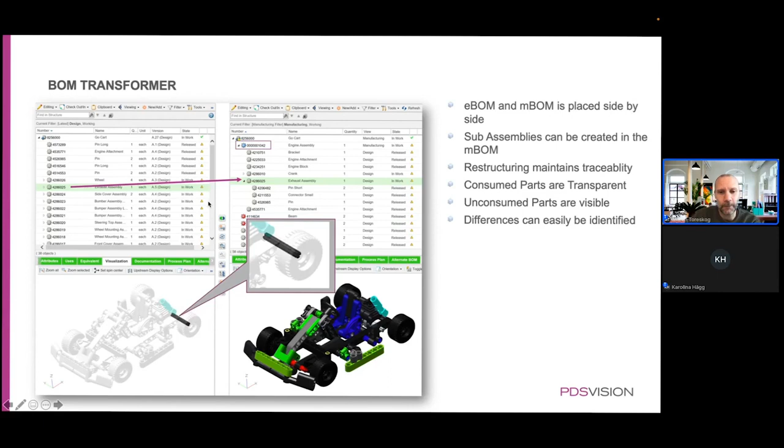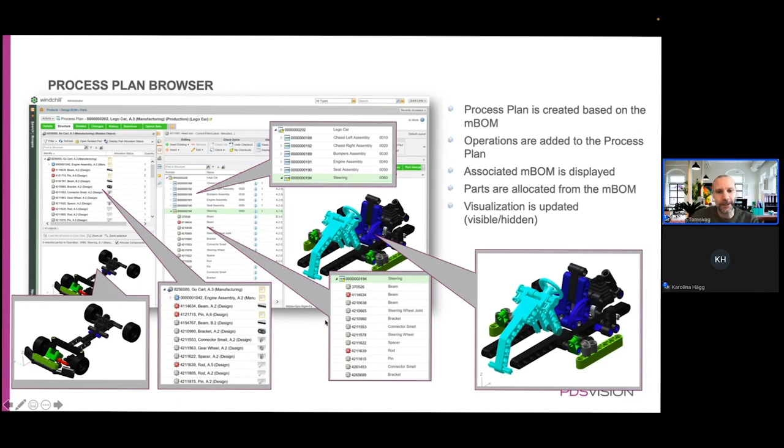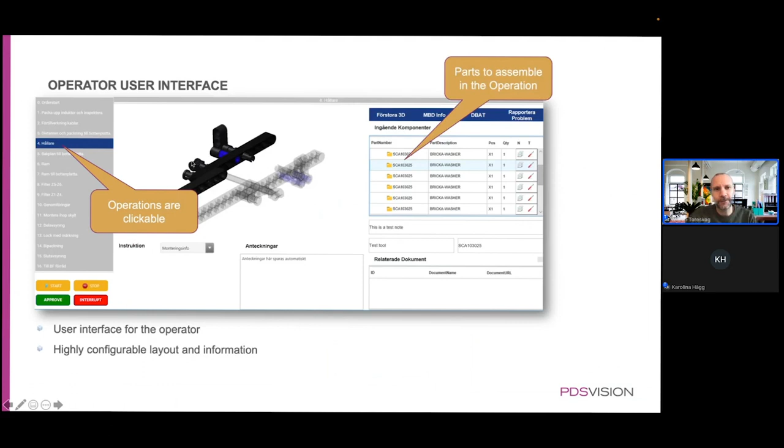The operator user interface. This is a screenshot from ThingWorx. And we have the list of operations that you saw in the process plan. We have the list of parts for each operation. When you click an operation, the visualization will be loaded. You could add required tools for that particular operation. You can have associated documents.

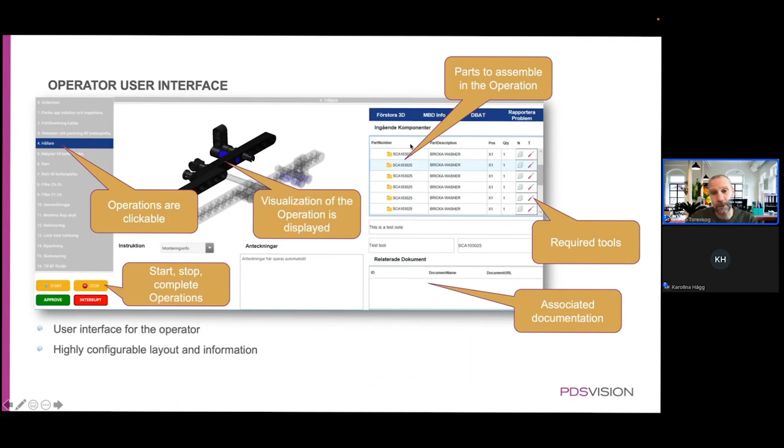You can start and stop the operations. And you can also report problems here. So creating a change notice, for instance, from ThingWorx and start a workflow in Windchill. So that was the slides.

I will now move into the demo part of this session, and I will start by creating an mBOM from an eBOM. So I will use the Lego car that I used during last sessions. I will then create a process plan from the mBOM. I will illustrate some of the operations, and then we'll take a look at the operator user interface. If we have time, let me know, Karolina, if we have time for that. I will also update the eBOM and see how that flows into the downstream processes.

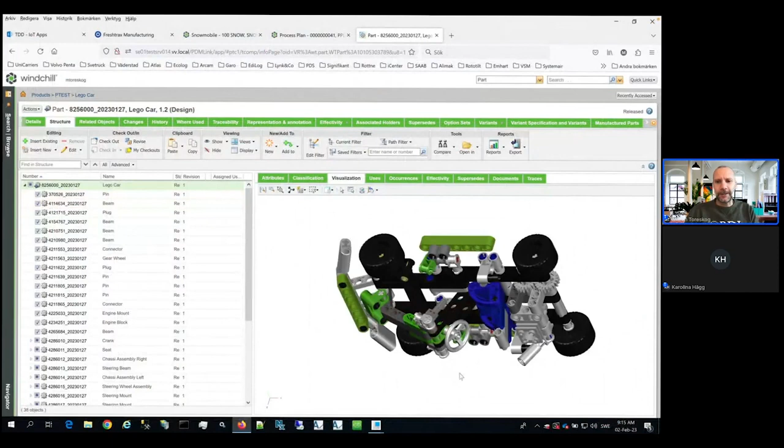So hopefully you can see my Windchill window here. Maybe Karolina, you can just verify that. Yes, it is looking really good.

It's a very nice car. Yeah, yeah, I built it myself.

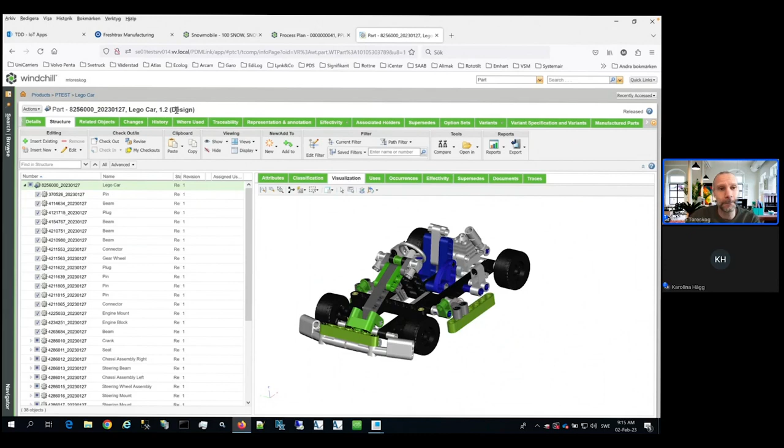So this is the engineering bill of material, and the view here, as you can see, is displaying design. That means that this is the design view of the BOM, which means that it's the eBOM. So I will open this in a separate window, which then allows me to have the eBOM and mBOM side by side. Currently, I don't have an mBOM, so it's empty here, but I have my engineering bill of material,

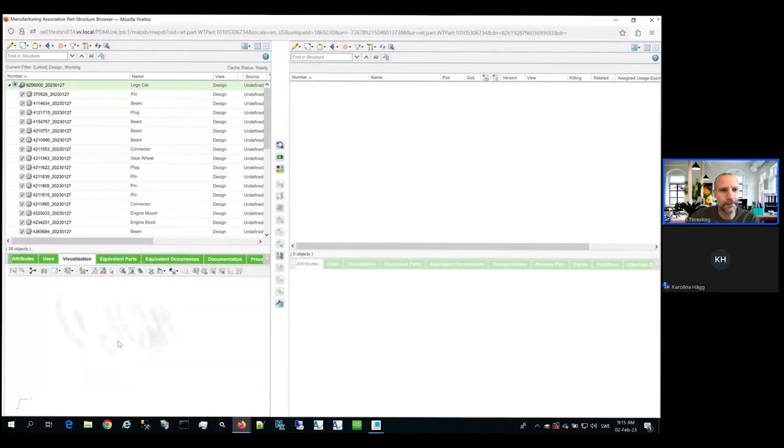and I have the visualization. If we just wait a second here, and the same thing works here. If I click a part, it will be highlighted in the BOM. If I click a part in the BOM, it will be highlighted in the visualization. So what I'm going to do is right-click the top level and say I want a new downstream branch.

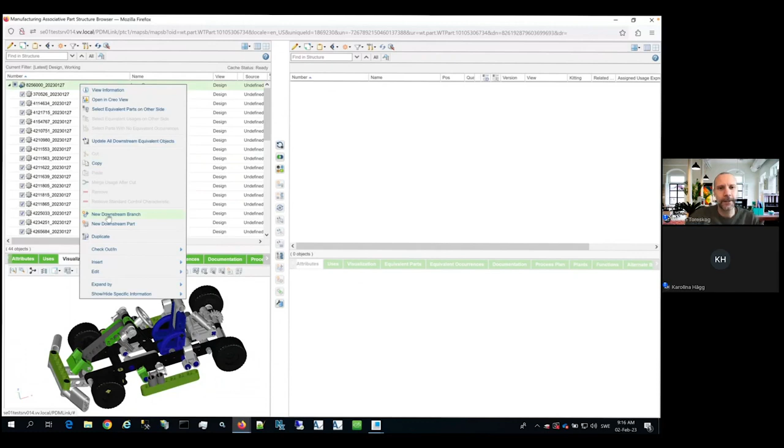Based on my configuration now, I will create a manufacturing view of this. So instead of the design view, I will have a manufacturing view. If I'm working with a service bill of material, it will display service here. So I'm creating a different view for service, a different view for manufacturing.

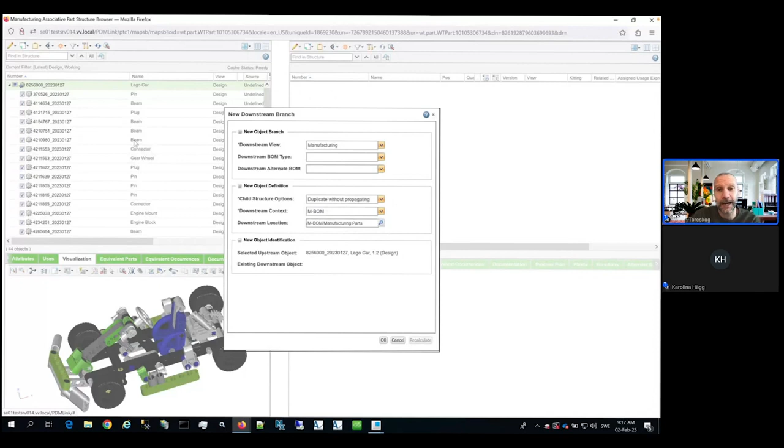When I do this, I have the option to either just create the manufacturing view of my part and skip all the children here. So if I want to completely restructure the bill of material, I can start from scratch, basically dragging and dropping the parts, or creating new parts here and then dragging and dropping from left to right. Or I can start by copying or duplicating the entire structure, which means that I will have an identical structure to start with. And I will actually do that now.

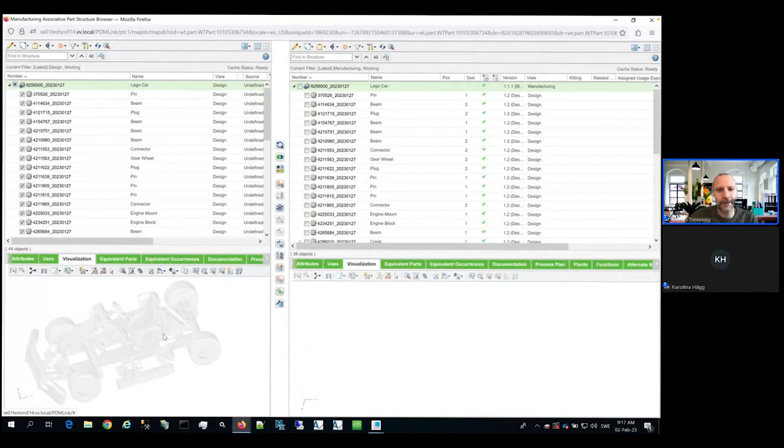So now I have my mBOM, and as you can see, since I copied the structure, all the parts have been consumed, which means that all the parts are grayed out like this. But on the mBOM side, we can see it's in shaded mode. So let's imagine that I didn't copy over this part, for instance, or that part has been added after I created my mBOM.

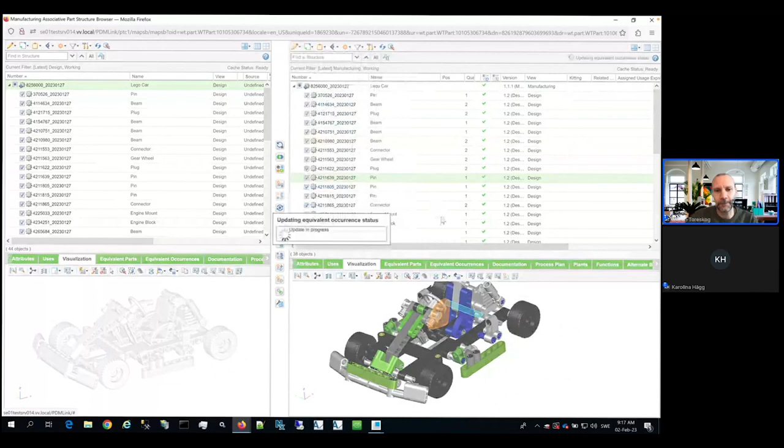So I will simply just remove that part, and we'll see what happens here. So that part simply shows up on this side, which means that this has not been added to my mBOM. So I can click that and then drag that and drop it on top of this one. But I will do a little bit more advanced action here.

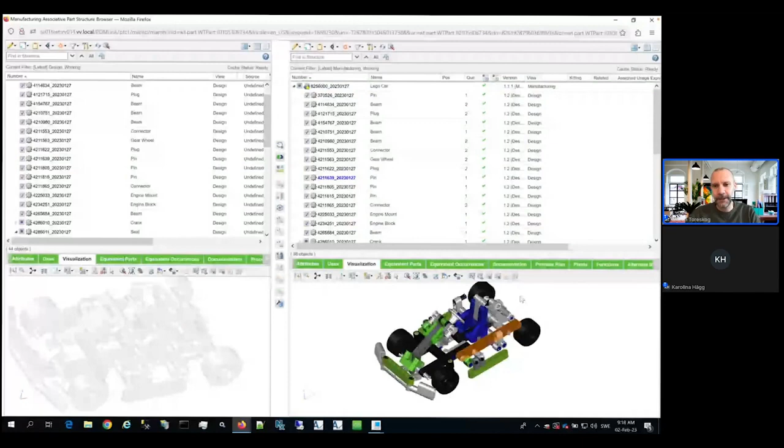So I want to create a pre-assembly of my engine. And as you can see here, the engine block, for instance, is directly below the Lego car. But I want to have that and the exhaust pipe and the crankshaft and so on inside my engine pre-assembly. So I will select my Lego car, insert a new part.

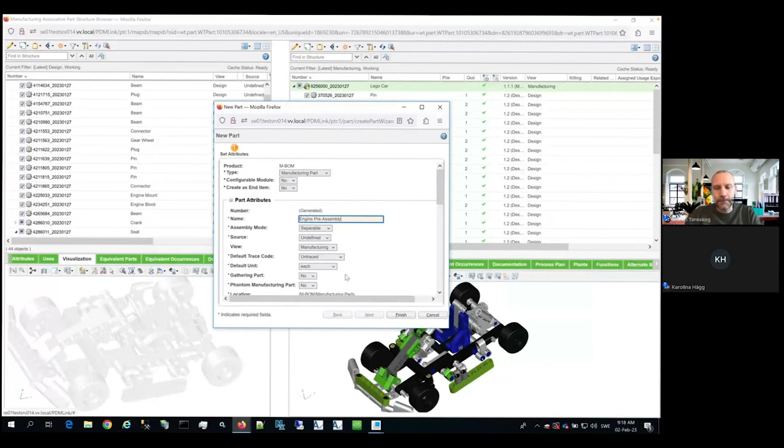And as you saw in previous sessions, I have different types of parts based on permissions, of course. If I'm a manufacturing engineer, I will probably not have this long list of parts, but potentially only the manufacturing part. So I'll call it engine pre-assembly. And that is then added to my BOM.

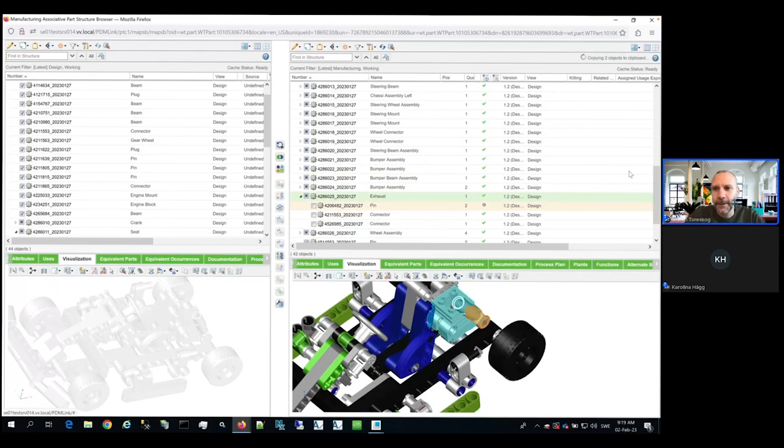As you can see, it doesn't have any children, but what I want to do is then select the engine block, select this part here. Let's see, I want the entire exhaust. So let's grab those. I will cut that from my top level and then right-click my newly created engine pre-assembly and simply paste it there.

When I do this, they're by default hidden, but I can click this to display the parts. If my machine works. Now, let me refresh there, and there you can see that they're back. But I will actually deselect those so I can see a little bit more what I want to grab here.

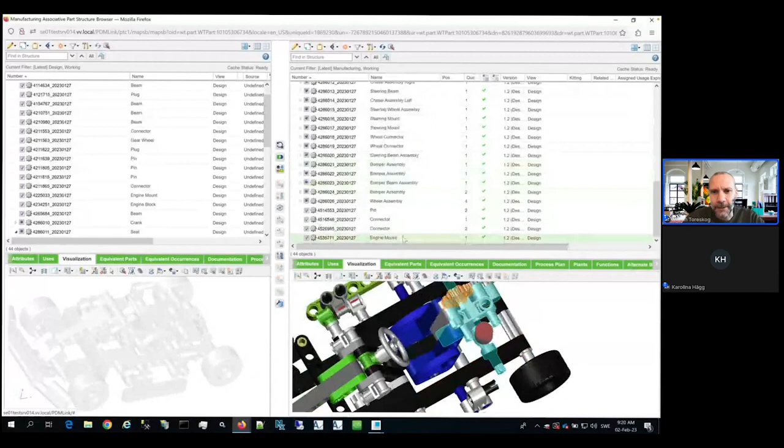So I will take that piston and then take the entire crank, and potentially that one and that one should be included in my pre-assembly. So I will cut that. I can drag and drop them here as well, but I think if it's a long way to scroll, it's easier to do it this way. And then paste it on top of that.

So the purpose of this is, of course, that when I produce the Lego car, I simply take one engine assembly from stock. I don't assemble these on the production line for the Lego car, if we imagine that we would do that. So I would have a process plan for the engine pre-assembly, which defines how to assemble this. And then I would have a process plan that describes how I assemble the Lego car. And then I will use this as an already assembled component.

If I would select the engine block here, since that has a new parent, it could be interesting to know where that is located on the engineering side. So I can right-click the part and say select equivalent part on other side. So even if I restructure it like this, it still has the traceability that this part is this actual part here.

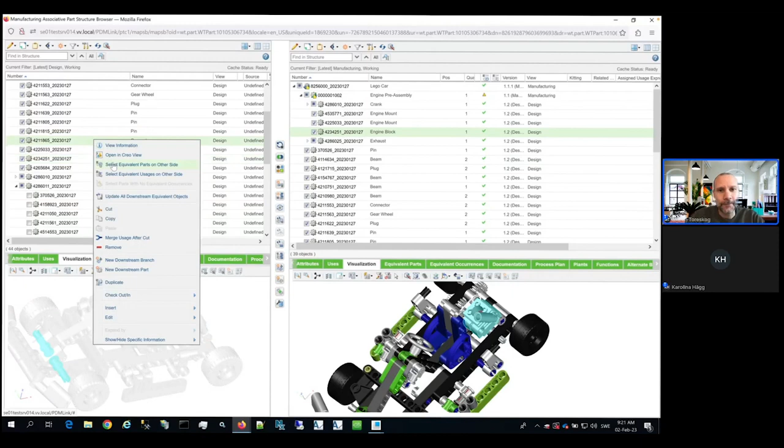And in the same way, if I would select another part here, it will then know where that is located. And this is how it keeps track of the consumption status. So it knows that I have consumed all the parts, and if new parts are introduced on the eBOM side, then I can add those to my mBOM. So I will check these guys in.

So what I did now, if we go back here to the overview, this was basically the first step. I'm creating the mBOM from the eBOM, restructuring it, but I'm not defining how I do things. This is what I'm going to do in the process plan.

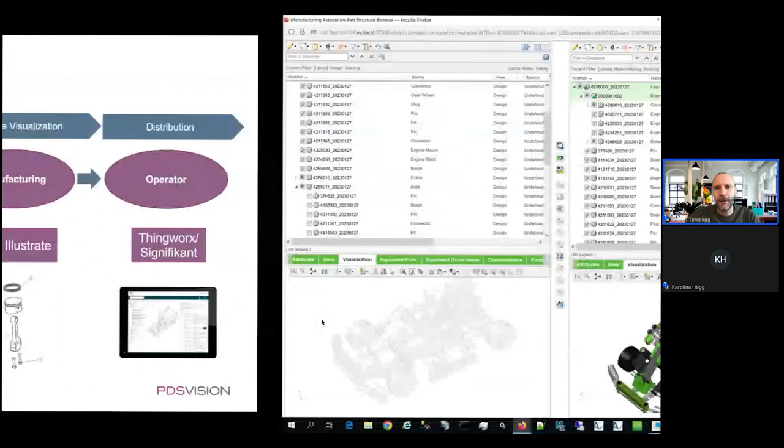So if I want to create a process plan for the engine pre-assembly, I'm selecting that part. And then I have a process plan tab down here. And then I would have a process plan for the Lego car, of course, to define how that is assembled. So I'm going to create one for the Lego car. Insert new.

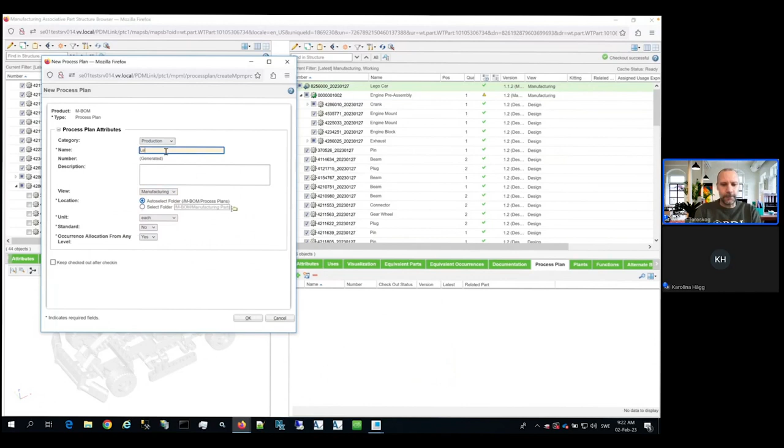Give it a name, Lego car process plan. So now I have my process plan. And as you can see, if I select another part, it will be empty here. So it displays the process plan or the process plans if you have multiple process plans for the selected part.

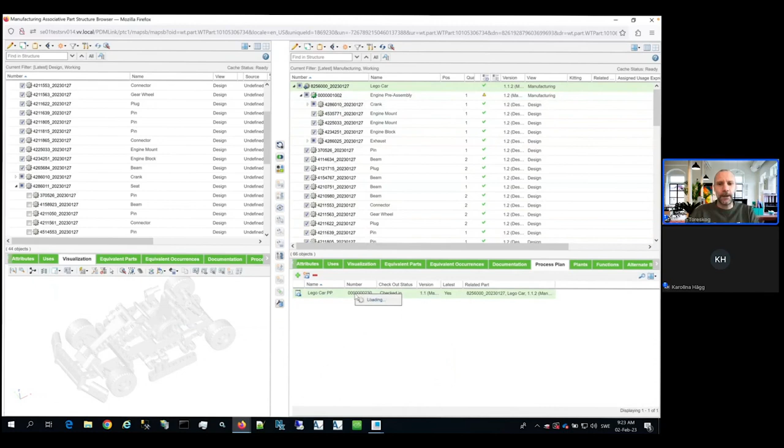And then I will navigate to the information page of the process plan now. As you can see, it's completely empty. I'm going to open the related part. So by creating the process plan, I associated that to the mBOM.

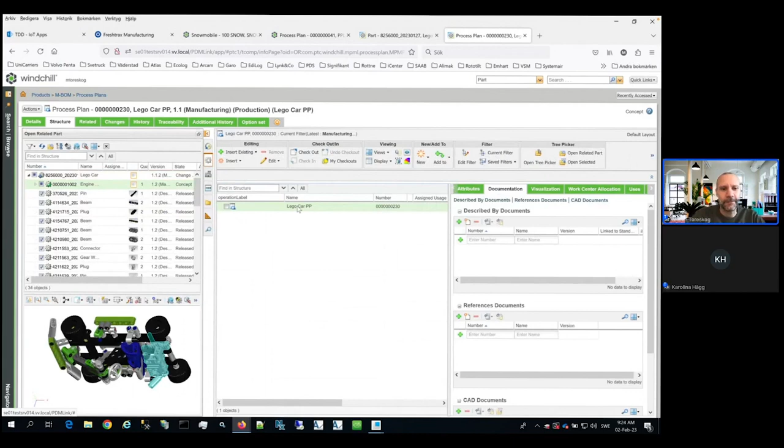So here I have the mBOM, and if I sort on number here, we should have the engine pre-assembly available here. So my task is now to create operations that define in what order I assemble this.

So we have two types in this configuration. We have two types of operation: a regular operation and what we call operation group. So typically in an ERP system, you would not define the operations on the assembly step level, you would have a higher level of operations. So this is what we represent with the operation group.

So let's say that you have different stations or work centers in your production line. That could typically be one operation group, but within that work center or that station, you would perform different operations. So these would be the regular ones.

So let's add 4 operation groups. And of course, I don't need to know how many I want. I can create them on the fly as well.

I can rename these. So let's call it, if I rename operations: order start, assembly 1, visual overview, assembly 2, and so on.

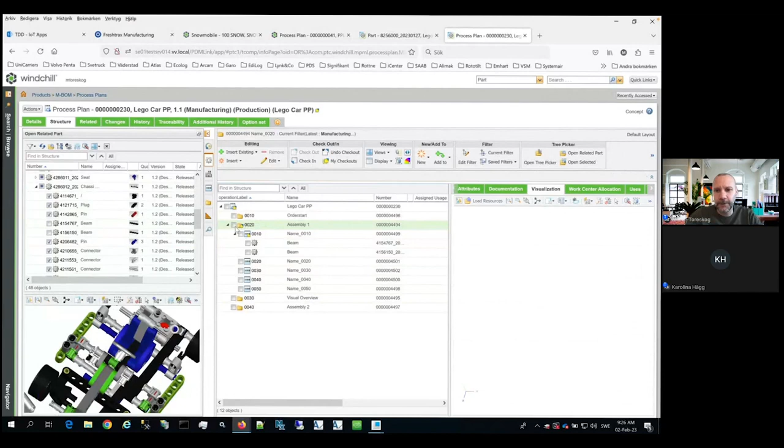And then I probably want that part in the same operation. And if I select that part, I can also, if you take a look at this, in the BOM here, I have 2 plugs. So if I would drag that over to the operation, I would actually get 2, but I want a single one here.

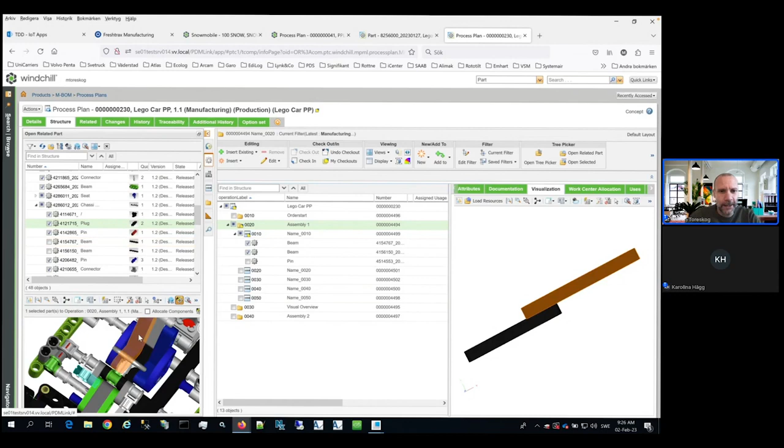So I can either display the BOM with occurrences, as it's called. Then it will split those 2 plugs into 2 rows. Or I can select the operation, select the part, and then say allocate. And then it will simply add only that part and not the second one.

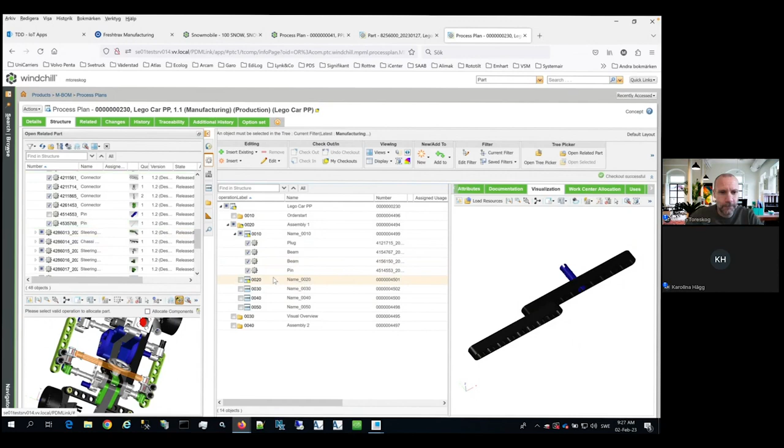So these are the parts that should be assembled in the first step. Then I will add that one and that one. Those should go into the second step. And then I'm not going to do the entire Lego car here, but I think you get the point that this illustration describes how I assemble these 4 parts. And then the second step will be to assemble this and so on.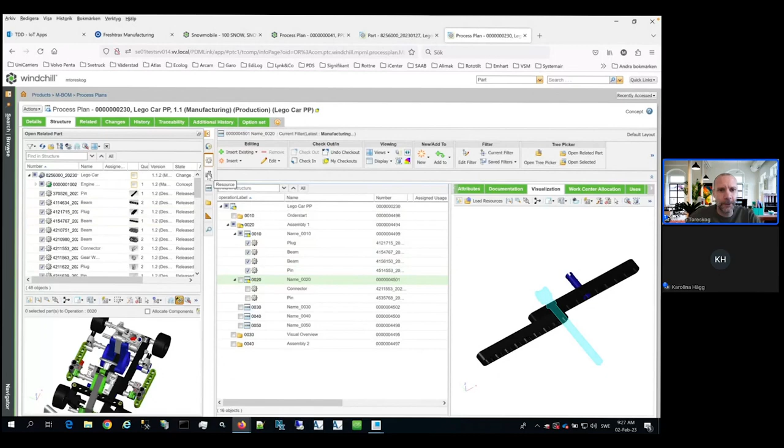It's also possible to add tools and fixtures and so on. So I'm going to click the plant icon. And here I've created sort of a library with tools and fixtures and work centers and so on.

So if we just imagine that we need a drill to perform this, I will simply drag and drop that onto my operation. And perhaps I need a screwdriver for the second operation here. And of course, if these have a 3D representation in Windchill, then those would show up here as well.

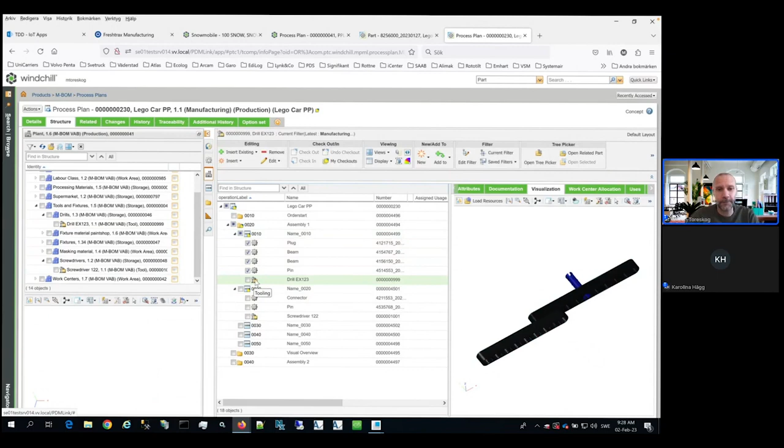In my case, they don't, but yeah, these are actually regular parts. It's a different type of part. So I'm going to minimize the browser there.

And if we take a look at this level here, for each of these operations, I can add additional descriptions, and I can add some formatted text with bullet lists, and do this, and then add a bullet list, and so on.

So you can also add documentation to this. So if you have a safety instruction or whatever, you can simply add that to the documentation tab here.

You can also define the time required for these operations. And of course, you decide on what level you want to do it. So let's say that the routing in the ERP system may be only defined to this level. So this would be the only thing that we would publish to the ERP system.

Then we would probably define the time on this level. But if the ERP system can manage the lower levels, the more detailed levels, we can add the time to these as well. So I'm going to scroll here. Here we have the setup time, the labor time, the processing time. There are more time attributes that you can add, and you can of course remove them from the layout here if you don't use it.

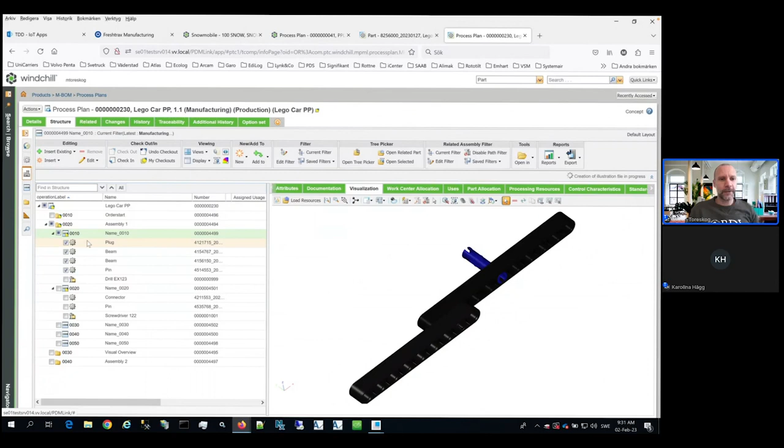So I'm simply going to right-click this operation and say New Illustration. Now Windchill generates a 3D model based on these parts and potentially tools and fixtures, and then it will prompt me to open Creo Illustrate, and I will log in to that.

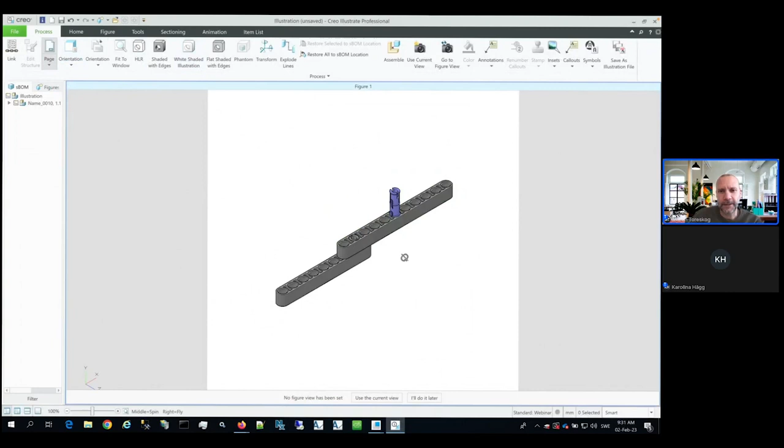I'm not going to go into detail about Creo Illustrate, we can do that in a separate session. But what we're basically doing here is exploding the parts.

So let's say I want to move this guy a little bit that way, and this guy there, and then have an explode line. Let's move this to there, add some explode lines.

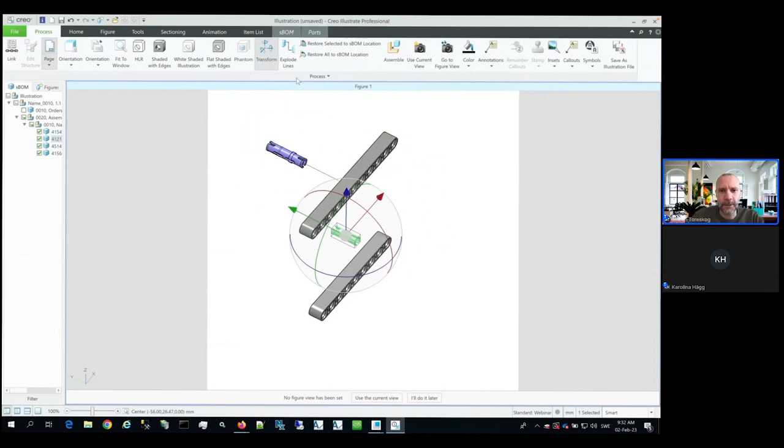And then perhaps just to clarify that it's actually that hole it's going to be inserted in, I can add what we call an inset. Yep, so let's keep it that way. And then I will simply save this.

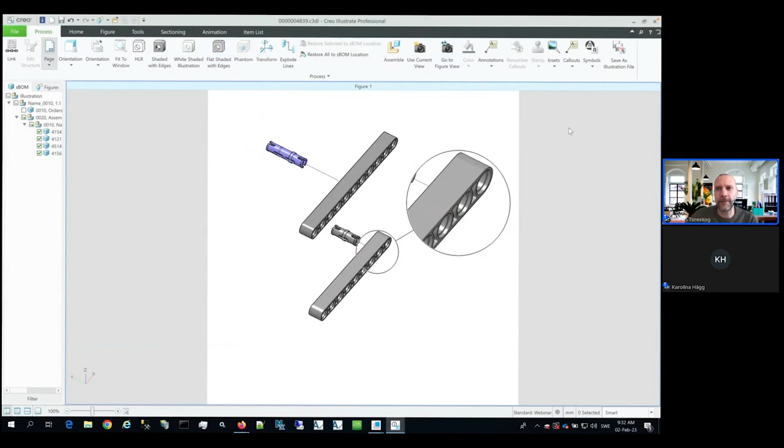So what Windchill will do now is store the 3D representation of this illustration along with an image file. So if I go back to the process plan now and select this operation - I may need to refresh this - we can see that it has added a document to this. This is the image of the illustration, but also the 3D representation.

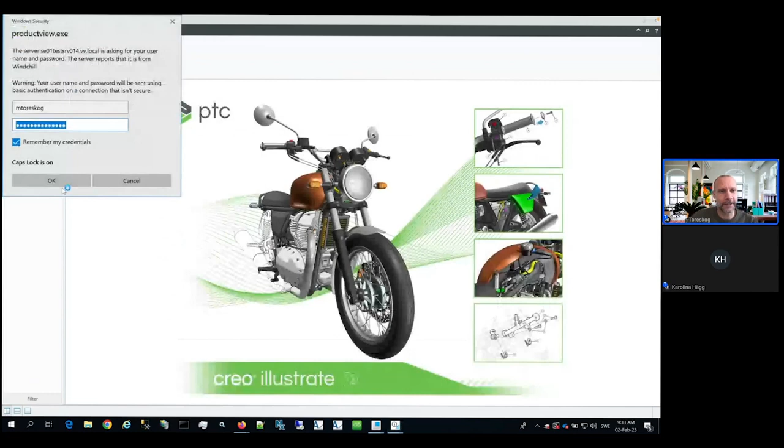I'm going to create one more illustration here, just so you can see that all the parts that have been previously assembled will automatically be grayed out in Creo Illustrate, so you can more clearly see what to focus on.

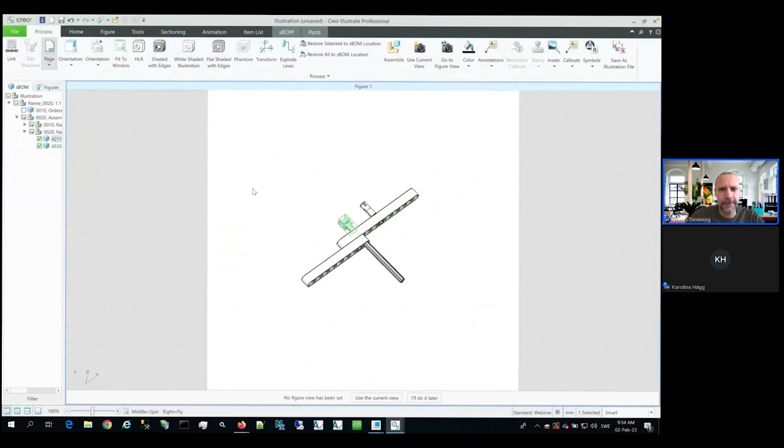So Creo. Here you can see that the parts I already assembled are grayed out. I'm going to do this. So my task now is, let's say the first step here is actually to put these two together. So I will simply do this, add an explode line, and perhaps something like this.

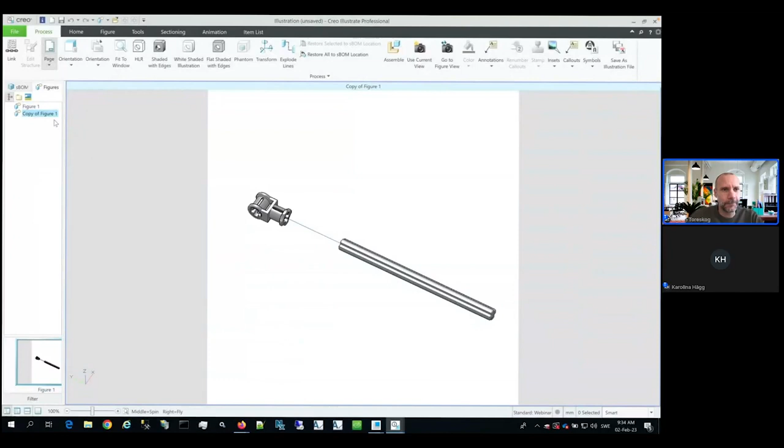But then I want to have another figure where I display how I put these together. So this should be restored, and then I will simply move these guys out like this, add an explode line to that. Oops. Like so.

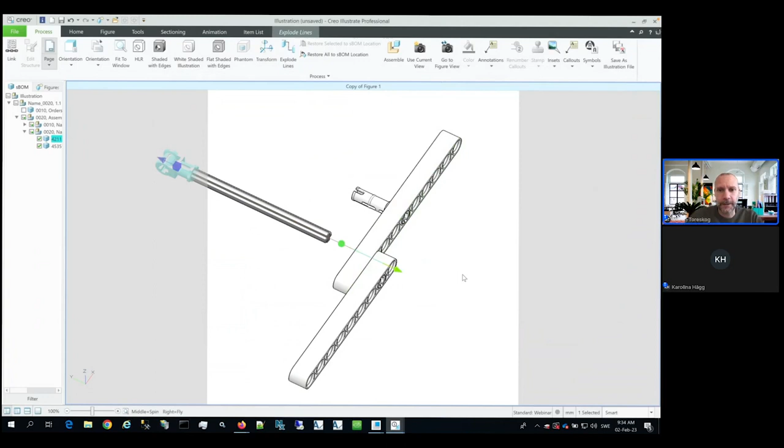So now I have two figures describing this one and this one. And I will save that.

And once it's done - let's see, it's still saving up here. Give it a few more seconds. There we go.

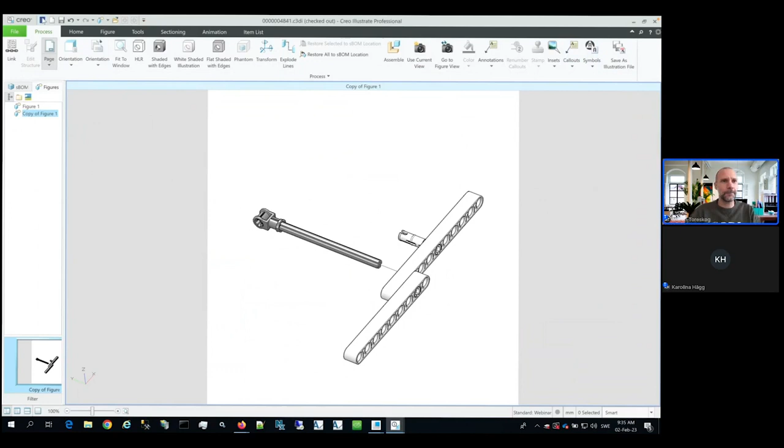So if I now refresh this, I will then have a document associated to this operation as well.

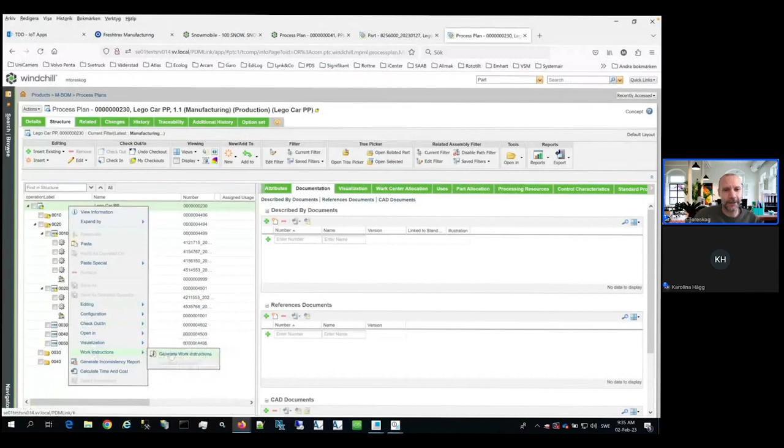So if I right-click my process plan now - and I'm aware this is not completed, but hopefully you get the idea - I can generate a work instruction. And that generates an HTML page with the images I've created, the illustrations, along with the parts used for that operation, and the required tools and so on.

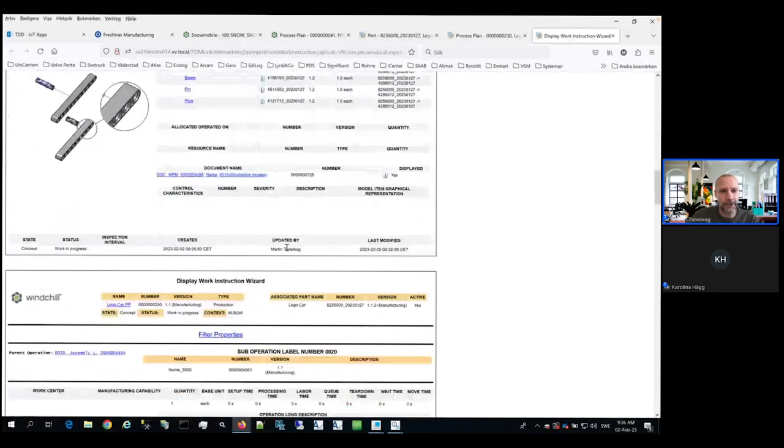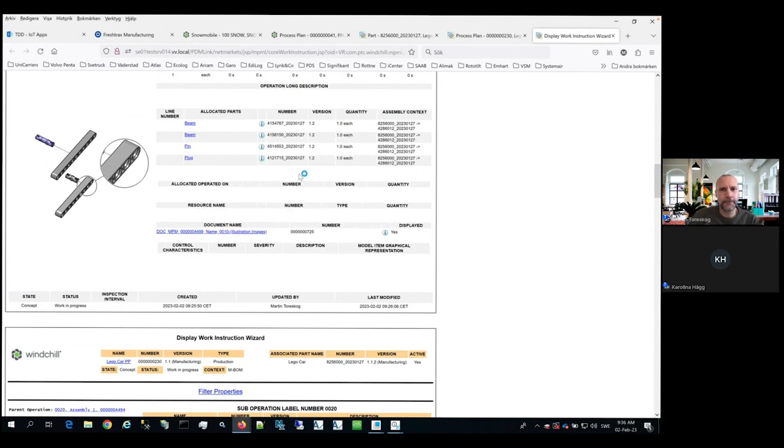And in this case I had two images, as you saw. If I click this, it will actually open that in Creo View. So I can view that in either the image or the 3D.

So this is the third step. And as I said in the beginning, all of these steps are associative to one another, so changing the eBOM will update the mBOM, or I can easily identify the parts.

And of course I need to define where it belongs to, adding additional parts to my process plan. But if I modify an operation by adding another part to it, I can simply update the illustration. So everything I've done so far will still be there, but additional parts will show up.

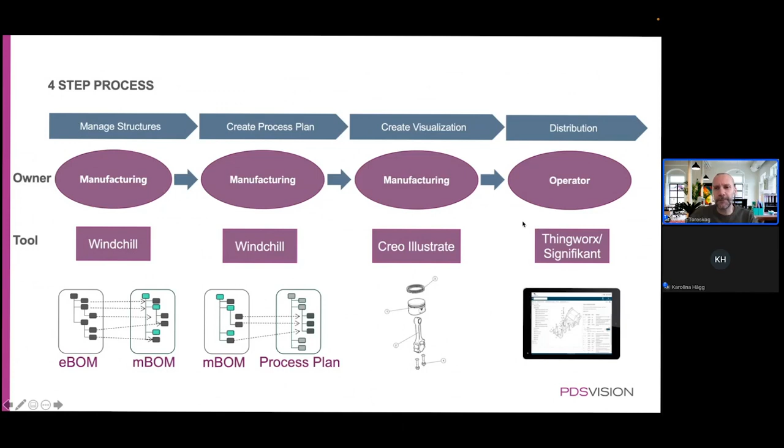The fourth step here is to either use the built-in work instruction as you saw, or what I will show you now is the possibilities that we have with ThingWorx.

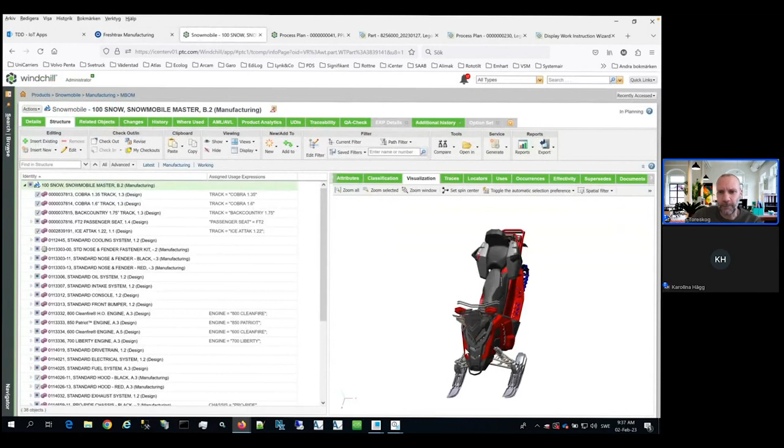If this works now - let's see, I had to restart my computer before this session. Let's see if it loads. Yes. So what I'm going to show you is an example of a company called Polaris that develops snowmobiles, and they have configurable products, so they have use options and variants to filter the BOM.

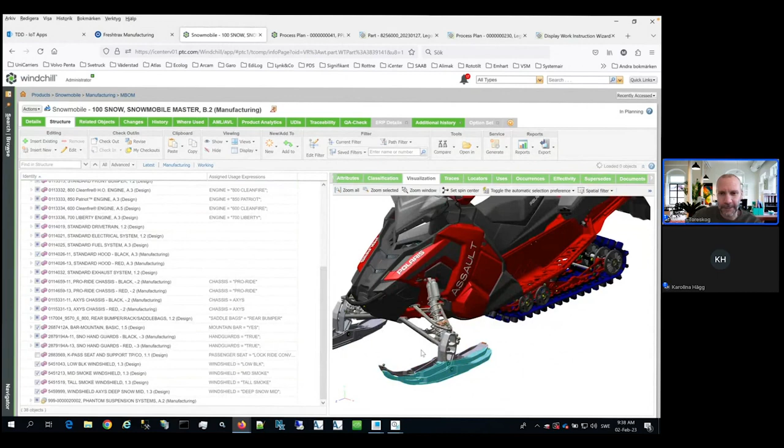We have a process plan that I will show you, one of these - what do you call it - suspension systems with the skis and so on. So the process plan looks like this.

So this is a pre-assembly where you start by adding that one, and then you have some new parts here and so on. And this can then be published to ThingWorx.

ThingWorx is an application or platform that you can use for many things, but you can use it for a connected work cell, where you can define your work orders and find those, and all the information defined in the process plan can then be displayed here.

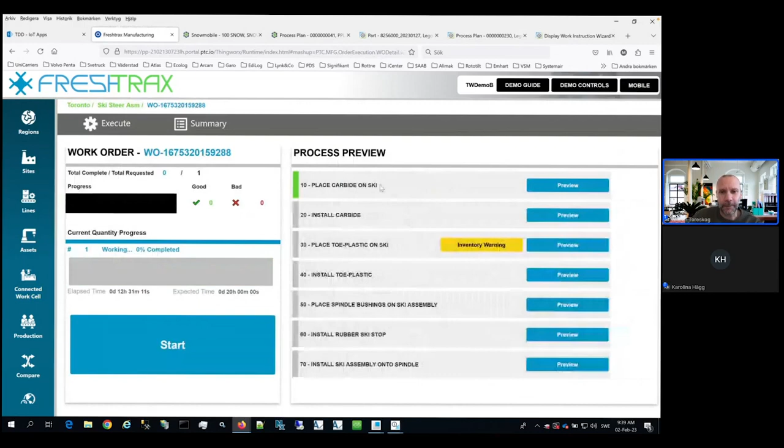So here are my work orders, I can view that. I have the assembly steps, which is what you saw here. I can start this, and that could then potentially send a request to the ERP system that starts the operations there.

So here I have my operations. Operation 10 will be the first step here, and all of this information is defined in the process plan. I have the parts that are used in that operation. I can say that I'm done with it, or that it didn't work. So let's complete that, and then it will move to the second operation.

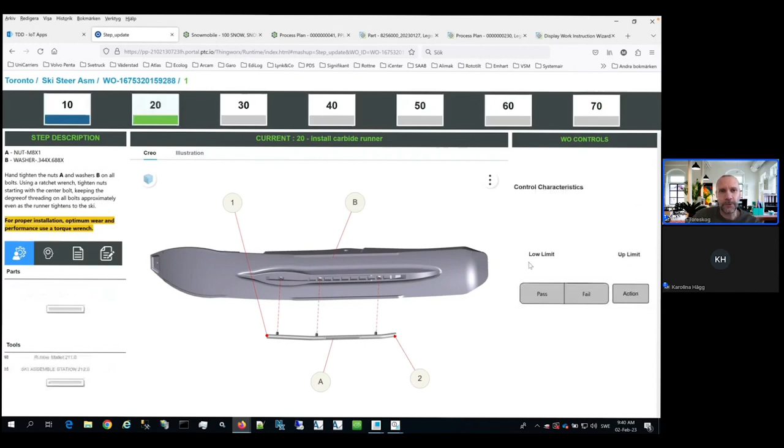In this case, there's a tool that's connected, so I can simulate the torque, for instance, needed for that. I can say that the torque was that, and then move on to the next step.

So defining the process plan, you could basically consume that in different ways. You don't have to use ThingWorx, but that's a potential that you can do.

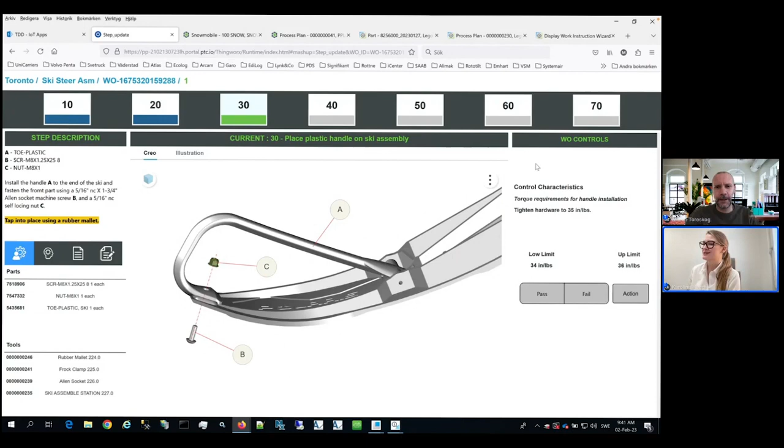So what's the time, Karolina? Is it question time? It is question time, but I think we can squeeze in Väderstad as well. I think it's a nice addition. You mean what I said, if we have time? Yeah, exactly. Let's see, since I restarted my computer, I just need to log on here again. So what I thought I would do is see if I have my Lego car here. We can take a question in the meantime. Yeah, that's good.

So we have this question: what are the benefits of managing the mBOM in Windchill compared to managing it in the ERP system?

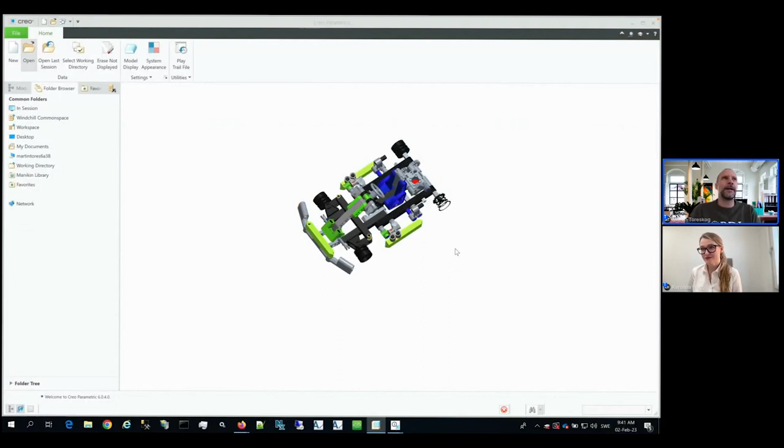Yep, that's a good question. Typically, some ERP systems have support for managing eBOM and mBOM, some don't. So then you only have one BOM, which needs to be the mBOM. The result of that is that either engineering needs to create the assembly levels needed for manufacturing, or on the manufacturing side we need to create these in the ERP system, but there's no connection to the source. So you basically need to go into Windchill or whatever PLM system you have and compare them, because the eBOM will change, and there will be quite a lot of work maintaining the mBOM and keeping it up to date, if they have support for this. As I said, some do, and we've actually heard from ERP vendors when they saw what we're able to do here with a 3D connection and so on.

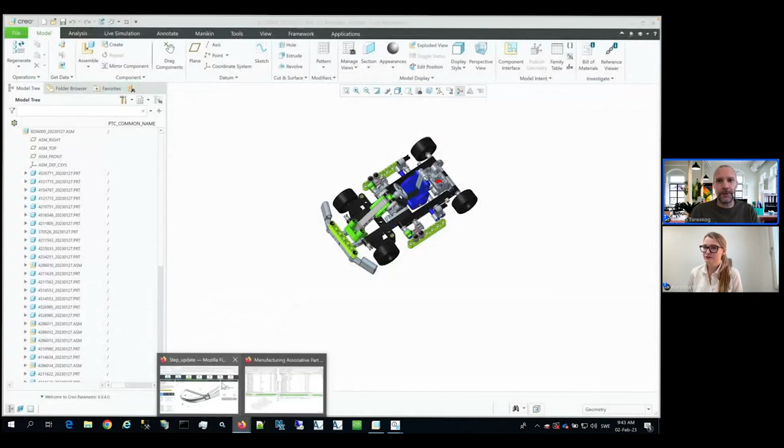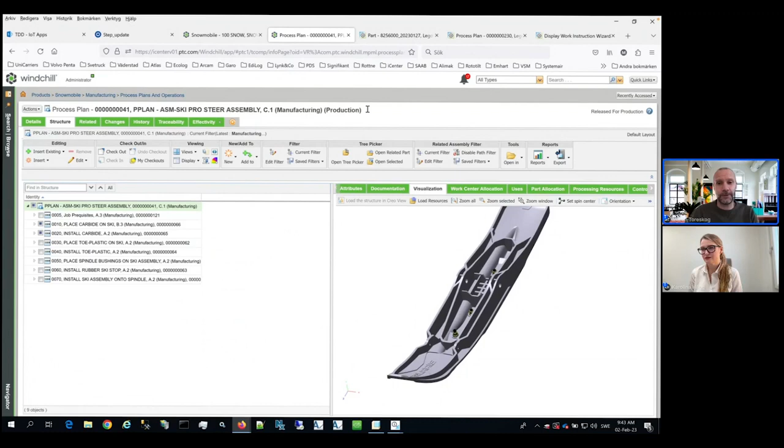It's difficult to compare the possibilities when you have the 3D visualization, because if you imagine defining the process plan in the order you assemble stuff, without 3D to see what a part is and what parts should be in which operations, you end up sitting with the 3D model, or the 2D drawing, to see what parts should actually go into each operation. So having the 3D, and having this digital thread between eBOM, mBOM, and process plan, is a huge advantage, I would say. Hopefully that answered the question. Definitely.

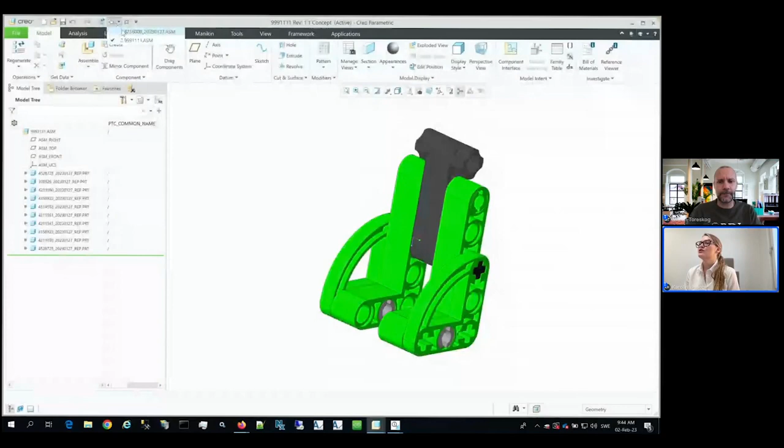You can, I will just open another assembly here. So if you have another question, we can take that. Absolutely. So how do you manage multiple production facilities, for example?

Yep, that's a good question as well. So here we have the manufacturing view and the design view. If you have multiple production facilities, it's often the case that you don't have the same production line, and you may assemble products in different ways. So the mBOM and the process plan is not necessarily identical. Then you could have different views. So it's possible to define plant A view, plant B view, and so on, and based on the same engineering bill of material, you can then create different views for each plant.

If, however, the mBOM is identical, you could use the manufacturing view, but it could be the case that some metadata of the parts are different. Then it's possible to define what we call extended data, so to the same part you can associate a metadata object that makes it unique for that plant. Let's say it's a make component in one plant, but a buy component in a different plant - that information can be different for the different plants. But the structure, you don't have to create and maintain two bills of material. Of course, if you have one or two plants, that's doable, but if you have 20 plants, it will be a challenge to maintain as many BOMs as plants. So that could be a useful feature as well.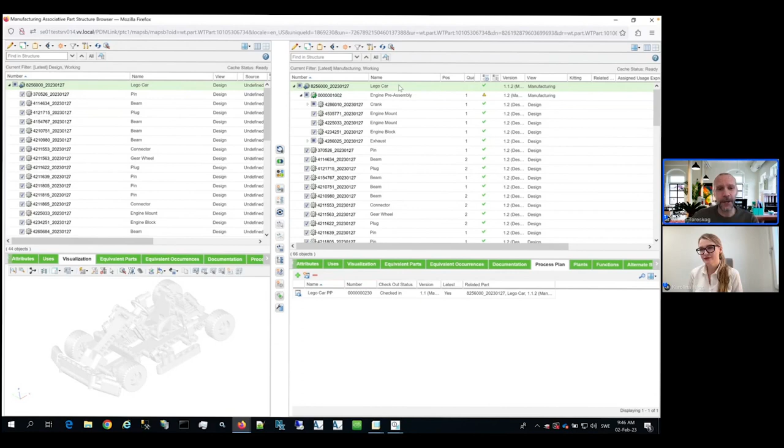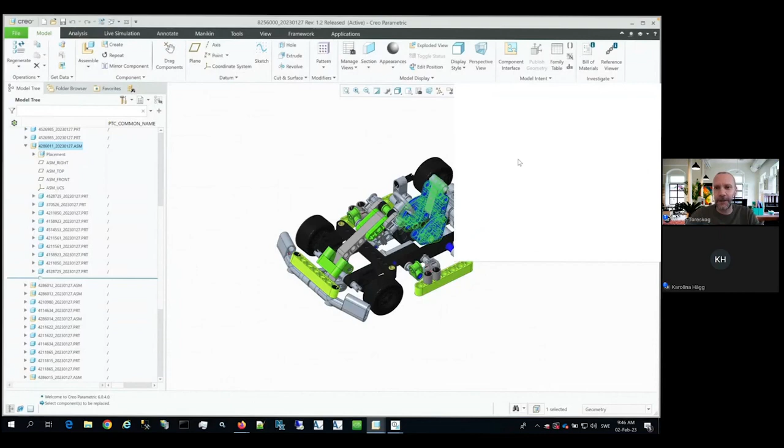Yeah, but different views is one option. So maybe I should just do this. So what I'm intending to do is replace this seat in the eBOM. I did this during last session, but I will just show you how this looks on the manufacturing side. So I'll replace it with this new seat.

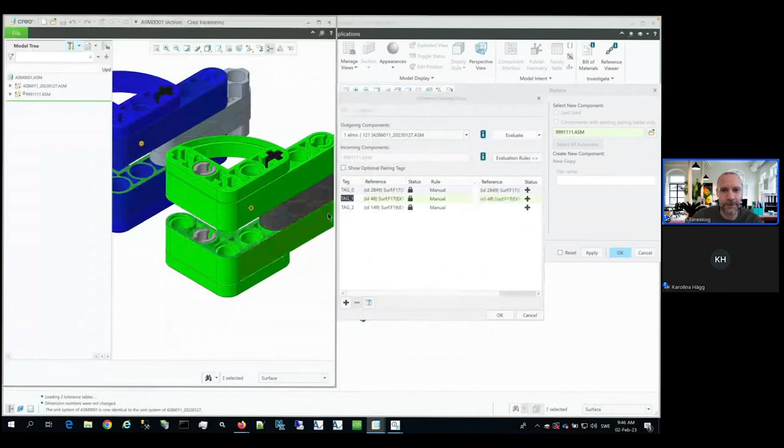And if you joined last session, I simply did a mapping between the assembly references here. You don't have to focus on that too much now. I'm just going to do it. So it will check out my top level assembly. If I want to, I can revise that, of course. Now I'm just going to do a simple checkout. Now I have my new seat, and that contains a lot of new parts in it as well.

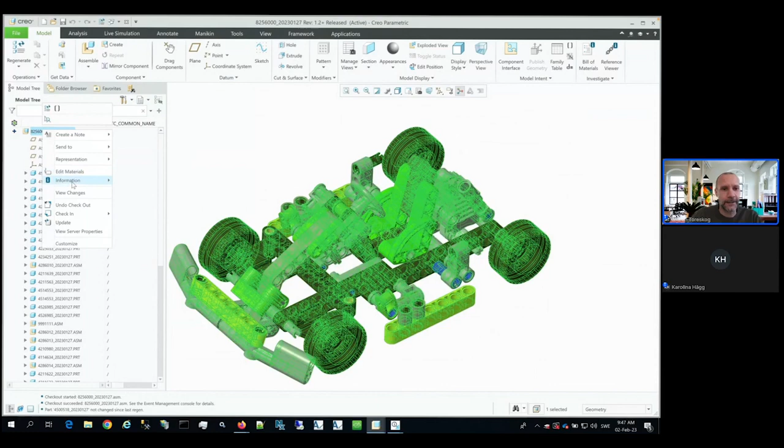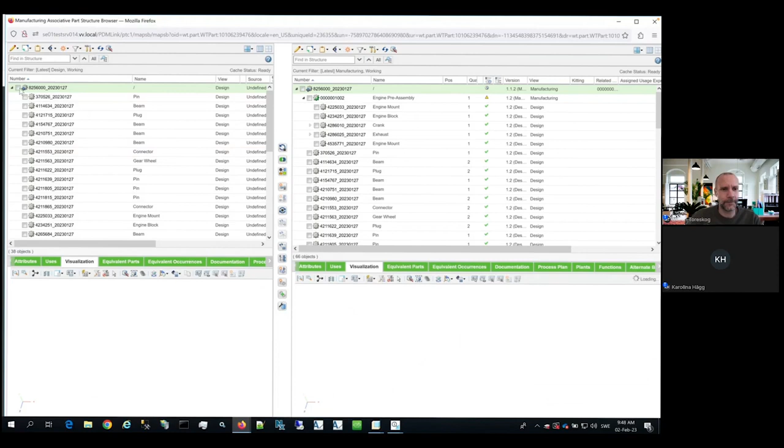So I will check that into Windchill, and I will then go to my eBOM. So this is the design view that will then contain my new seat. Yeah, I will open that in. It didn't look like it there. Let's see if the check-in succeeded. It was just a glitch, I think. Let's see here. There we have my new seat, and here I have my old seat.

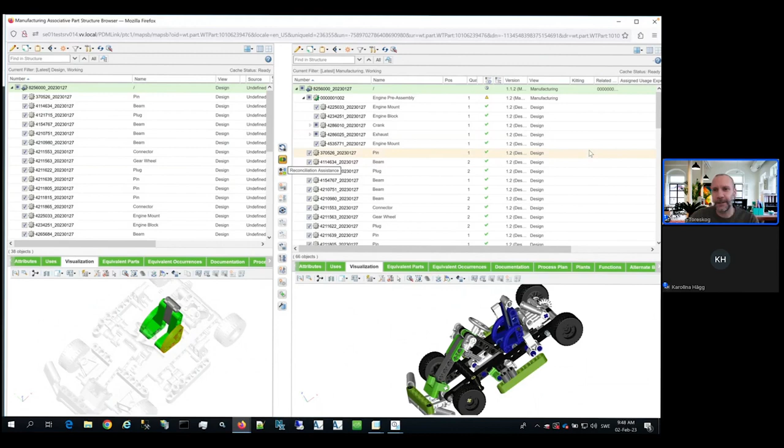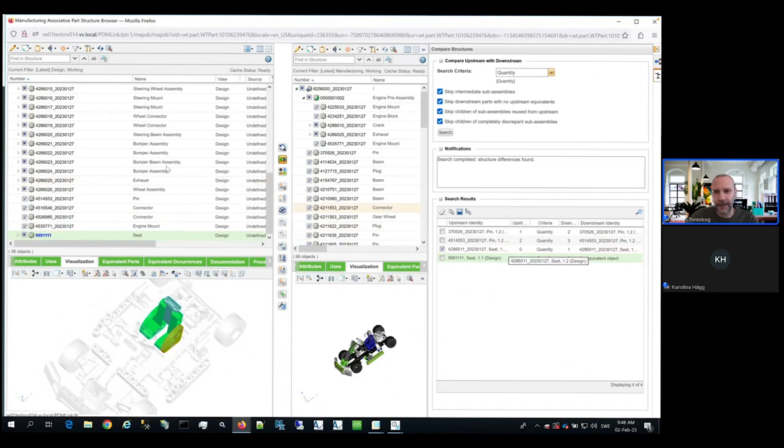So what I'm going to do is turn off the status of the parts, and then we can see that this seat is missing. I have the option to compare these structures as well, to identify the differences between them, part by part. So here I can identify that this seat is on the upstream side 1, on the downstream side 0. So it highlights that particular part. This seat has 0 on the upstream side, engineering side, and 1 on the downstream side. So I can either see it in the 3D or compare it part by part.

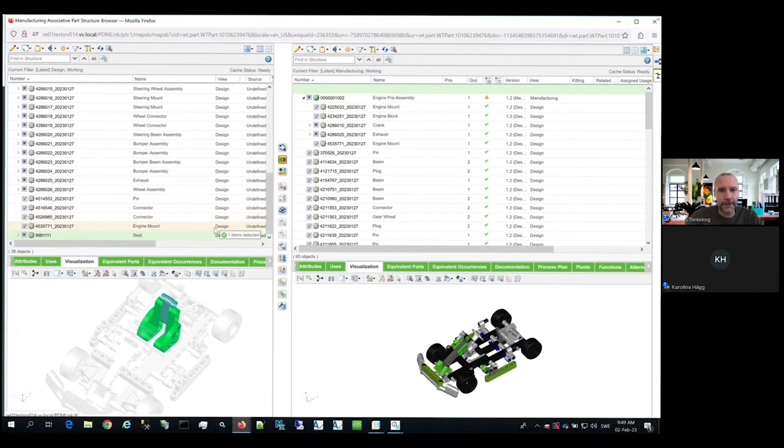So my task is basically to remove this guy and then add the new seat, and I will add that to the top level here. Let's see if I just refresh that quickly. Add that new part, and then the BOMs are up to date again. And of course, if this was used in a process plan, a similar fashion would be used to update the process plan and drag this to the operation where it belongs. Good.

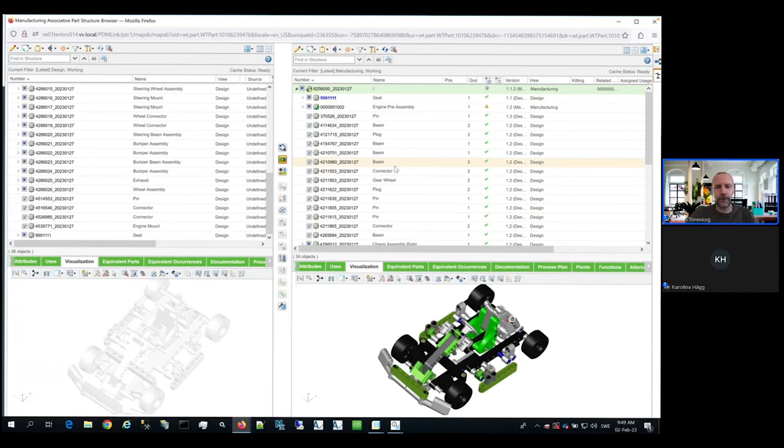Yeah, for sure. Great. So the last question is, if you manage the mBOM in Windchill, how do you define when a change is introduced in production? Yes. So typically, if you have a change process that sort of drives the change, if you don't have the mBOM, of course, you would do all the engineering work in regards to that change. But if you have the mBOM as well, then that can also be included in the change, of course.

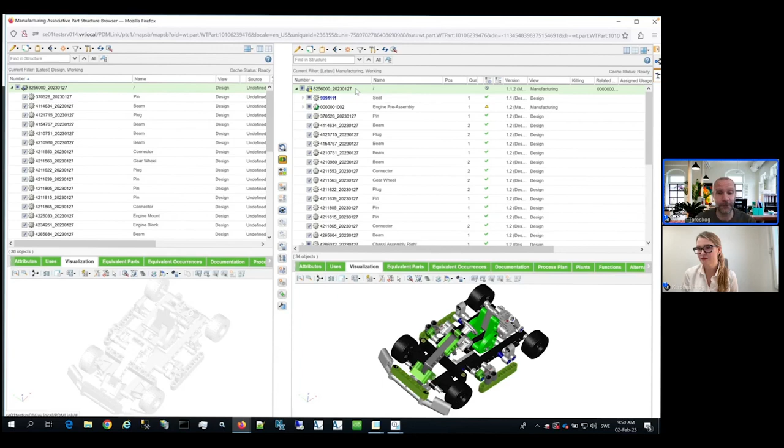And if we take a look at, let's see if I have something here. Typically, you would define a sort of phase-in date. When will this part be introduced? A date or a serial number when a part is introduced in production. In the change process, it's possible to define what we call effectivity, which is basically the introduction date or the phase-in date. And that's how you typically do it in the ERP world as well. You set a date when a new part number should be introduced and so on.

And that could be defined manually on the part, but it could also be driven from the change notice. If you have multiple parts that are introduced, you can set that effectivity on all the parts in that change notice. I think that should answer the question. Some companies actually define it in the ERP instead. So we push the mBOM, we push the process plan to ERP, and then in ERP they define the phase-in date. But it's also possible to do in Windchill.